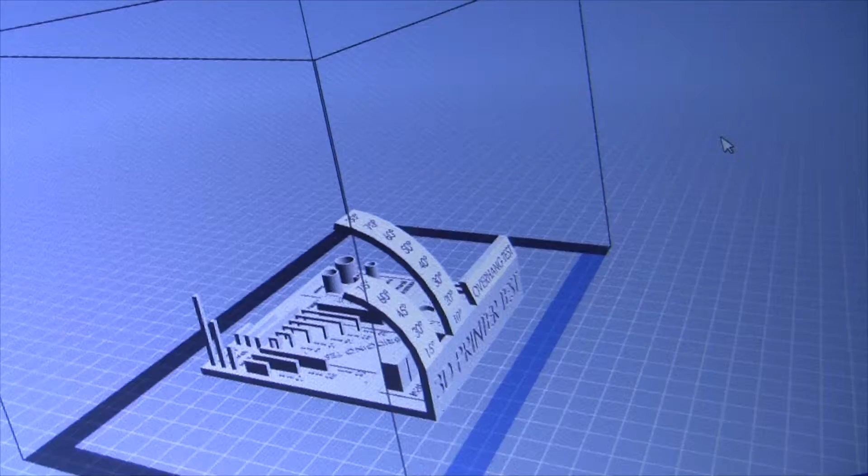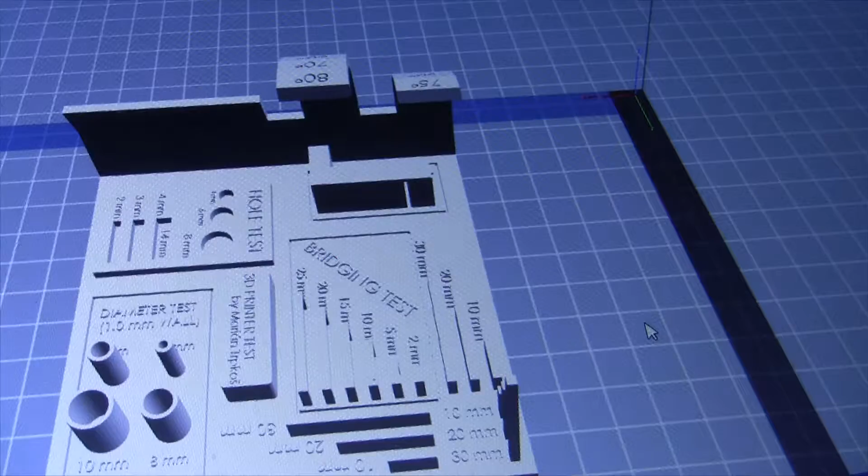Before I print something for real, I'm going to try one more test. This is a kind of all-in-one test I found on Thingiverse again. It's got overhangs, little posts, supports, wall thicknesses. So this will be a fun project to do an all-around test for the printer. So we're going to bring this one up.

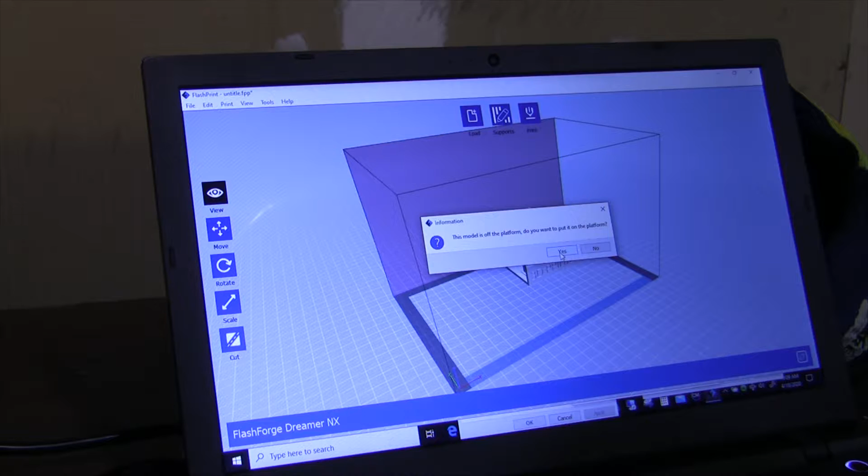This is a nice feature of FlashPrint. If the model is off the platform, it'll put it in the middle for you like this. That looks like a nice size print. It's supposed to take about 4 hours, so we'll go ahead and print this.

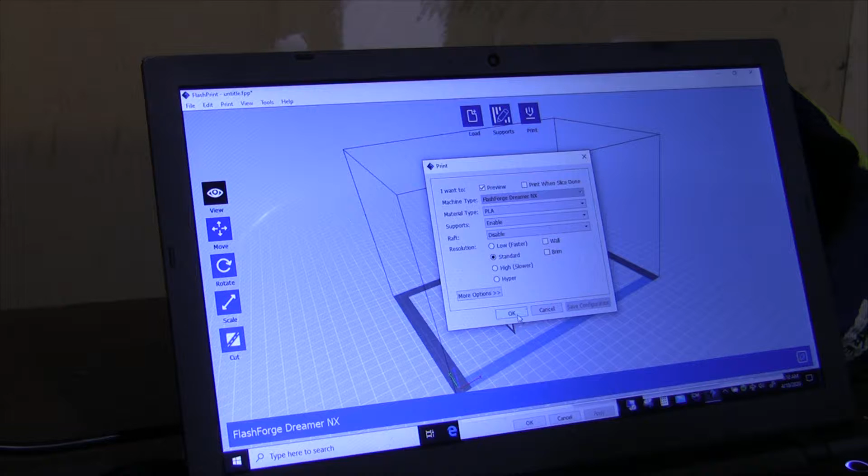I'm using the USB cord because with this version of the firmware, it won't print files created by FlashPrint from the SD card that plugs in the side of the printer, but it does work from the USB port. So I'm going to print this. I'm using PLA standard, and I'm going to go ahead and save this.

Now it's going to print, and it saves the file. So theoretically I could take this file, put it on an SD card and plug it into the printer, but that doesn't seem to work. So I'm going to click on Send GCode, and that should get the printer started on this project.

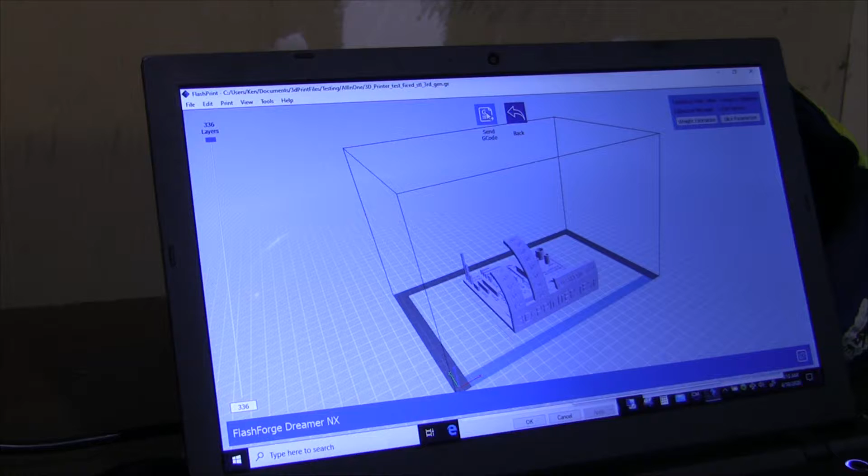I'm going to reposition the camera, and then I'll press that button. Alright, ready to get started. So I'll send the print to the printer.

Sending the printing file. It says downloading file on the touch screen. Alright, and it's going to go through its normal process where it has to heat up the bed and all that kind of stuff. So we'll wait for that. I'll turn this off for now, and we'll come back once it gets started printing.

Alright, it's heated up, starting to print. It's going to take about 4 hours and 15 minutes to print, so we're obviously not going to watch that. We'll come back later, partway through probably.

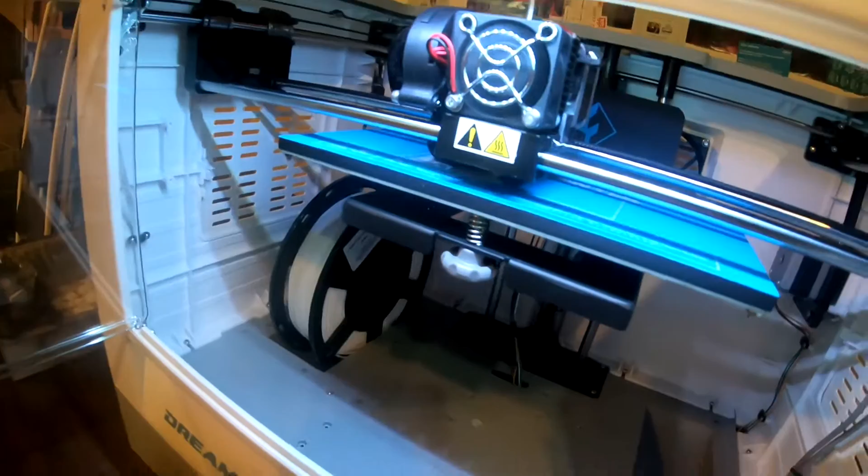I'm going to try using my GoPro to get a closer look at how it's printing. My other video camera has autofocus, and when the heat's coming up off of the bed and print head, the focus gets all wacky. Looks like it's making the base of the print. Looks like it drew a line at the start to get rid of any blobby material coming off the printer, so that's interesting.

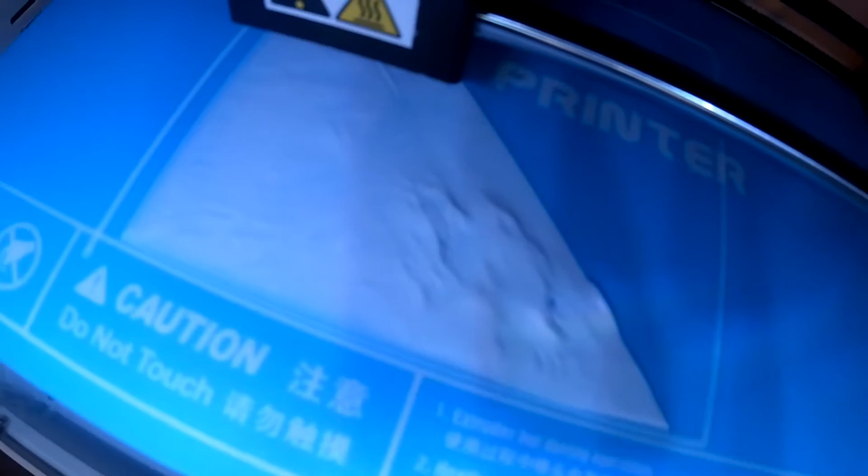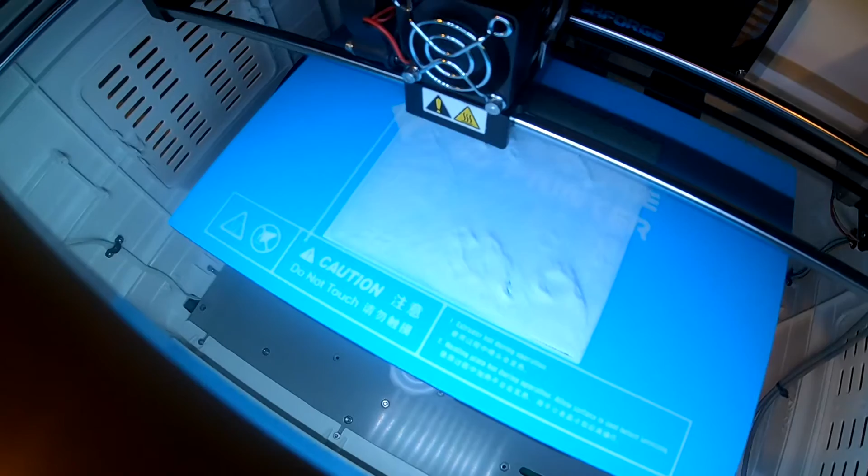Alright, we'll come back later and see what's happening. Looks like it had some adhering problems on this section of the print, but now it's sticking better, so maybe I'll fix this up. That's some bed adhesion problem, which apparently is a problem with the bed temperature. Probably wasn't high enough - it's pretty cold in the garage this morning, and I only have 50 degrees set, so with FlashPrint you can customize the bed temperature, so I'll play around with that.

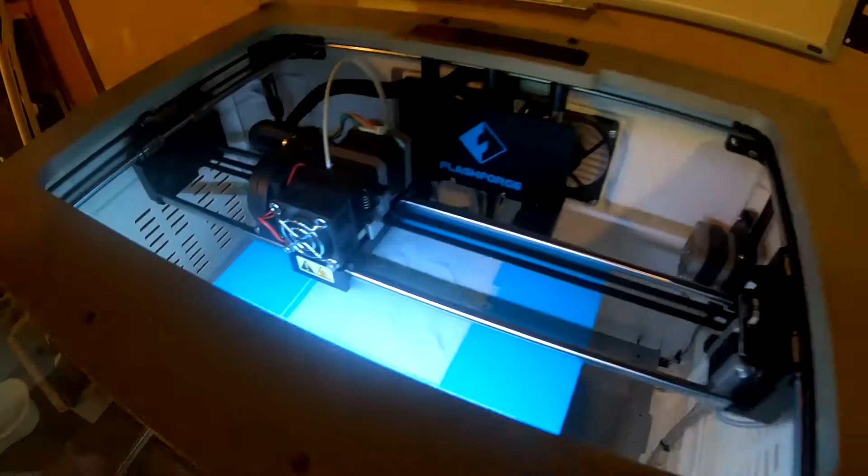I'm also going to do some testing of the hot end temperature. There's some bridge tests over on Thingiverse. I'm going to get some of those and try them out. Probably not this one, a different one. Probably this one.

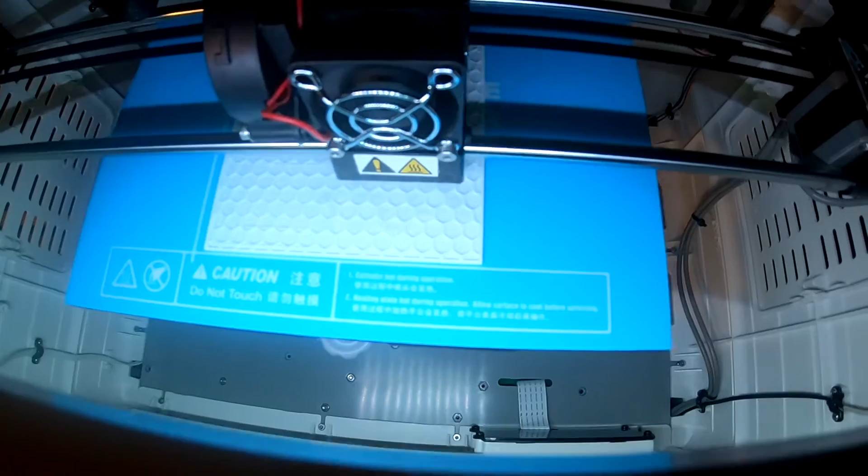Bed adhesion doesn't seem to be a big problem - it's moved on beyond that. It made a hexagon pattern, and now it's building up some of the other features of the print, it looks like. We're 2 hours into the print, and it seems to be going okay.

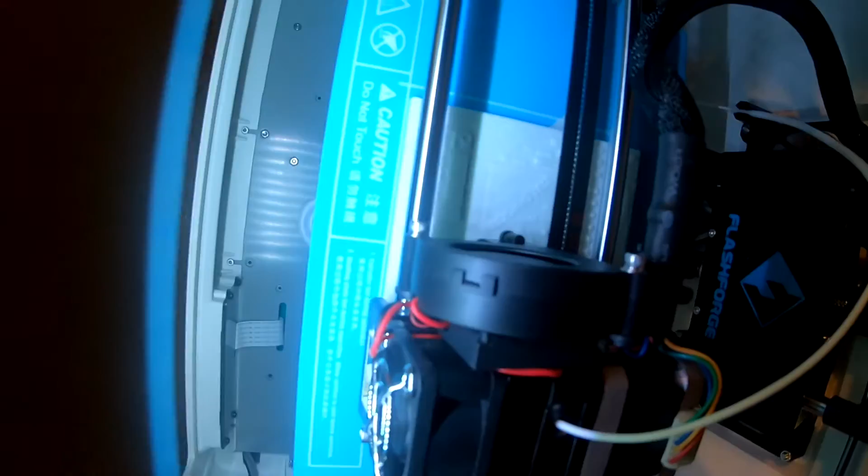Bridge section. Started on some cylinders over here. So everything's looking pretty good so far. I definitely have a bed adherence problem on this corner, so maybe that corner looks like too. I'm gonna have to raise the bed temperature on my next print and see how that works out.

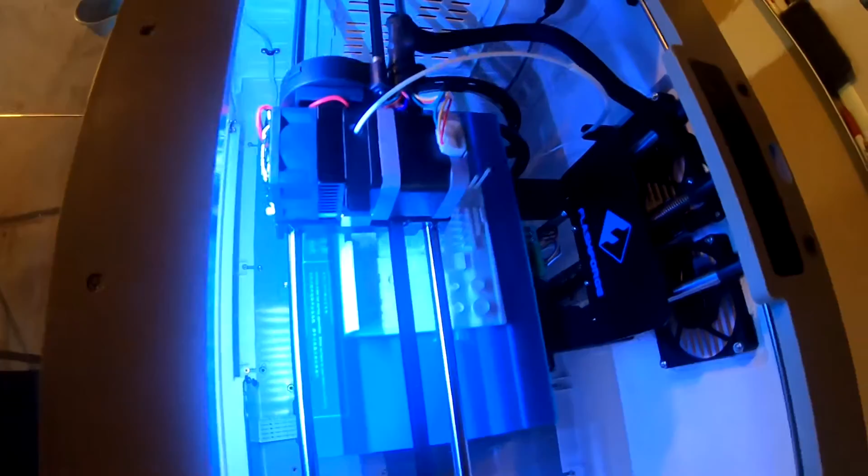Alright, 4 hours into the build and it's doing the overhang test. Still building some little pillars in the back too. Switch it back and forth.

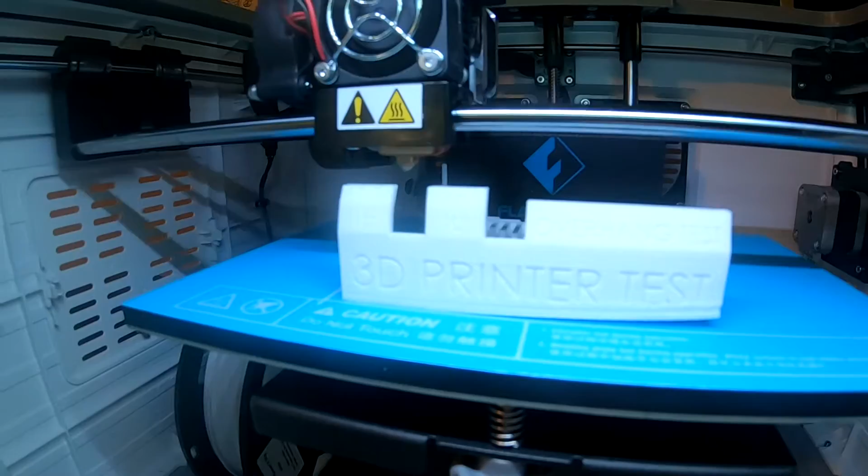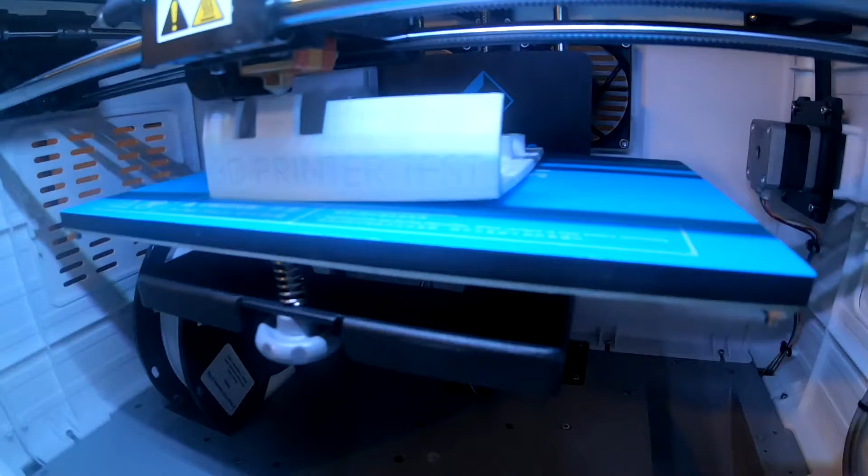I think it seems to be printing pretty well. Good definition, so except for the bed adhesion problem, everything else looks really good. I'm really happy with that. Alright, the print's almost done, just finishing the overhangs.

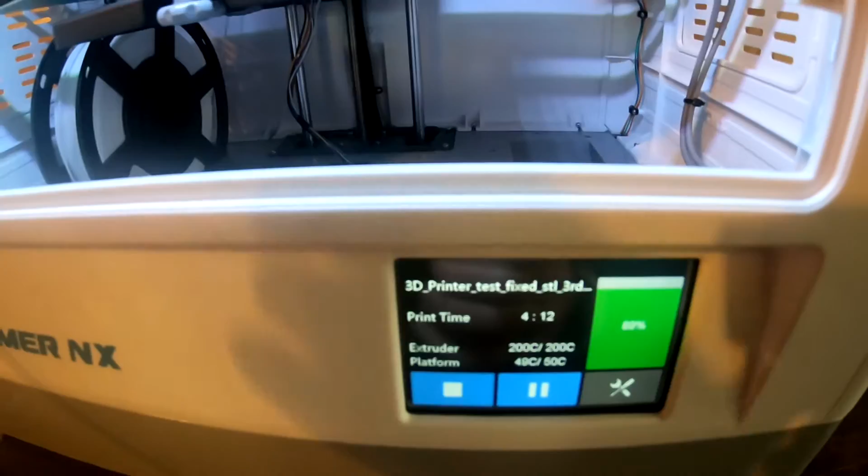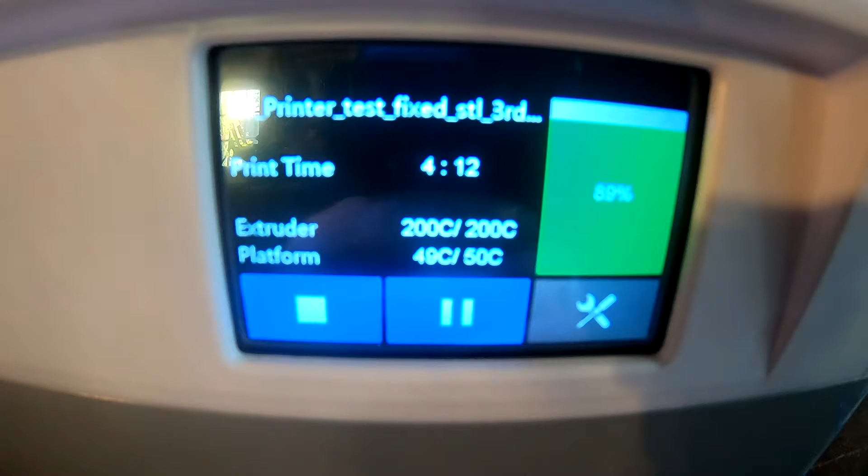So far, we're at 4 hours and 12 minutes and 89% done. The FlashPrint software said about 4 hours and 15 minutes, so it's pretty close. Turn it down pretty soon.

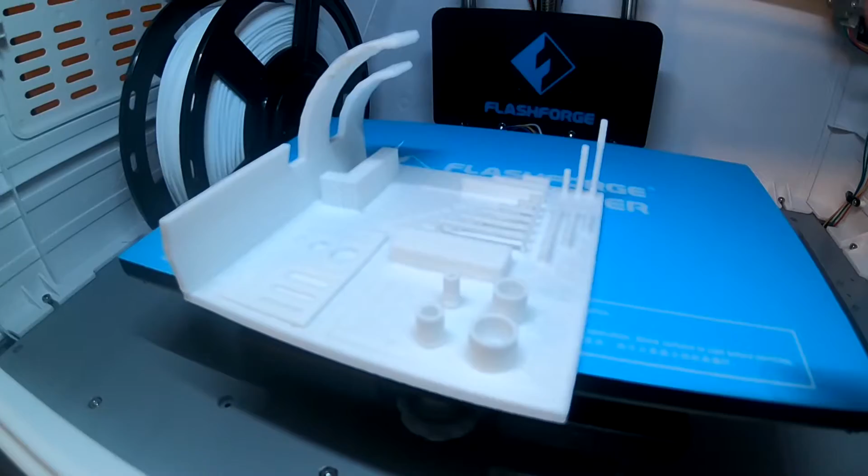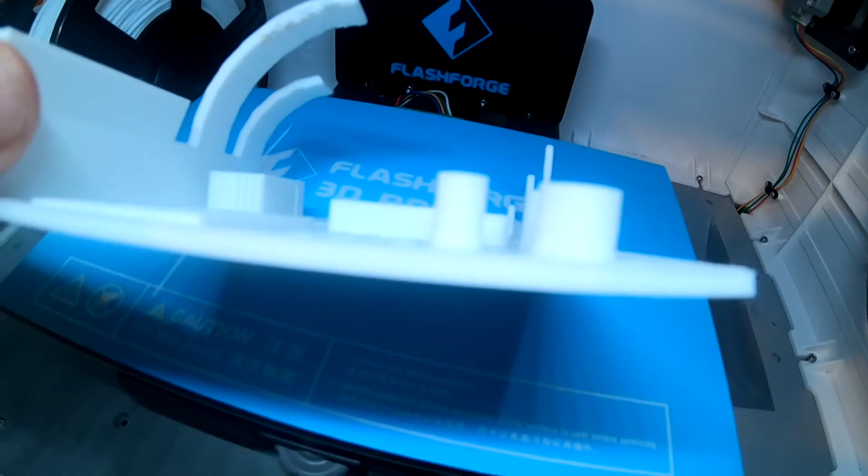So here's a close-up of the build. As you can see, everything worked pretty well except for this warp on this side because the bed didn't adhere very well on this edge. So if you look at the printout on the front, you can see that this right side is not quite square.

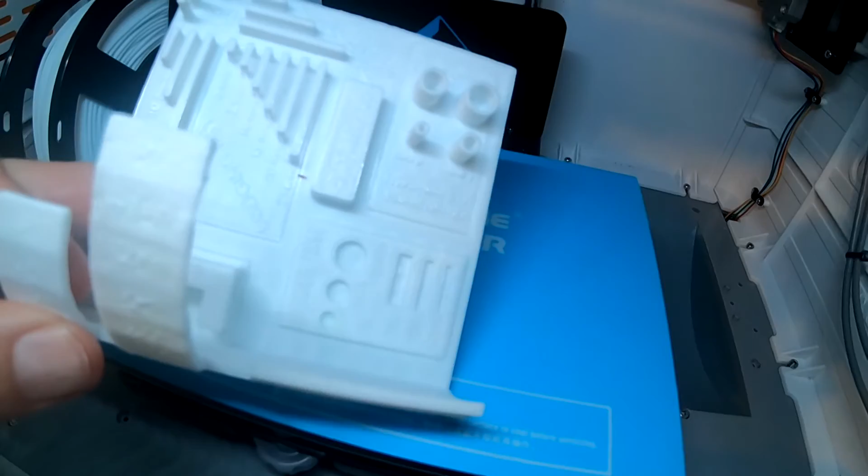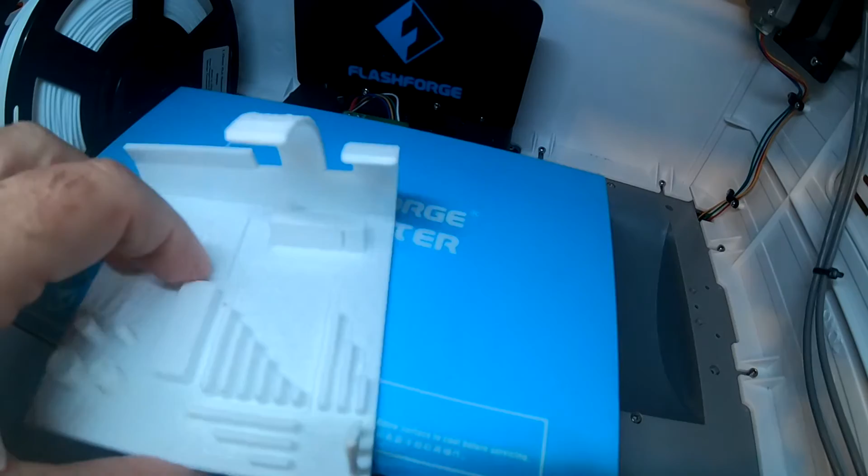So all the overhangs worked up to 80 degrees and 60, 75 over here and 80 over here, and all the bridging tests worked. Look down in here, you can see all the bridges are solid, the posts are solid. Everything looks really good, the holes came out really well. The printing for the holes is a little bit hard to read, but I'm not sure what this cube is for - I have to look into what that's supposed to be. All these cylinders came out really well, I think.

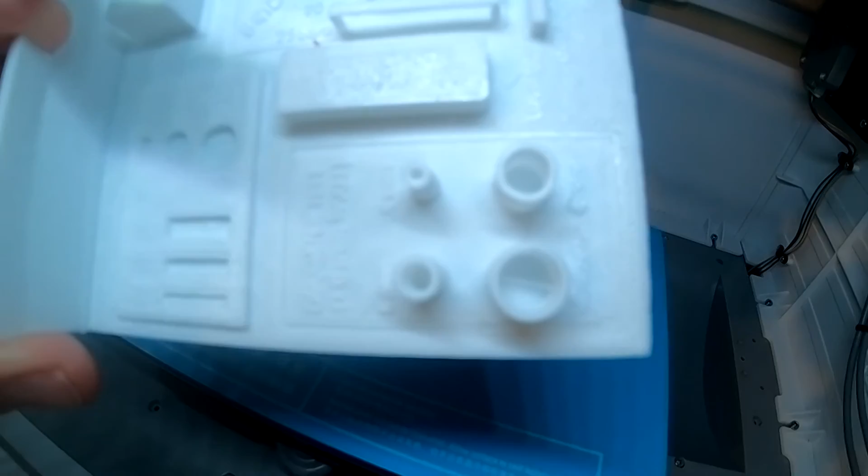Alright, on to the next test, which is going to be a temperature tower test to test the best temperature for the hot end. Meanwhile, I'll adjust the bed temperature to get better adhesion.